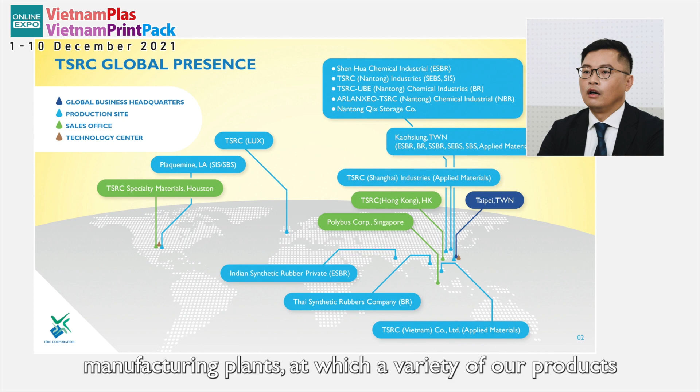Here, I would like to introduce you our worldwide operation network in more detail. As you can see from this world map, our main base of operation is in Taiwan, with our global business headquartered in Taipei. Kaohsiung also houses one of our most important manufacturing plants, at which a variety of our products are manufactured. We extended our company's reach first off to Thailand, and from there to China, where we have several production sites.

Besides, our joint venture in India is followed, and our acquisition of USA Dexco Polymer in 2010 enabled us to continue our success in the west of the world. Among all the production sites, TPE compound manufacturing is at 3 plants: Gangshan, Kaohsiung, Shanghai, and the Vietnam factory, which allow us to be close to our global customer and provide worldwide service.

This leads to the next topic of TPE compound manufacturing. Our TPE compound global production capacity is 23,000 tons per year, consisting of 3 plants among the 3 TPE compound production sites. Vietnam plant is our latest addition, established in October 2018, located in Binh Duong province in Vietnam, and it is also the first automation plant in TSRC.

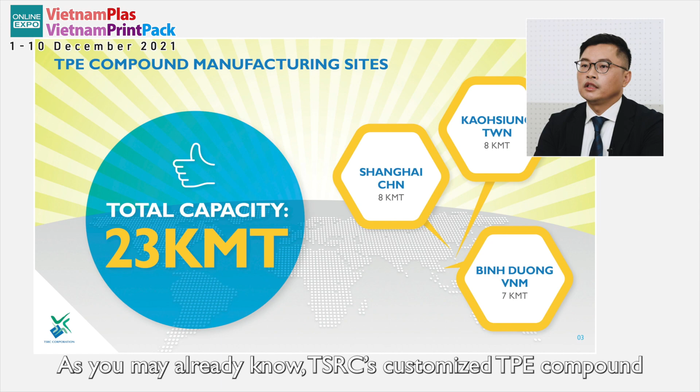As you may already know, TSRC customized TPE compound materials contain a variety of applications, and we aim to focus our advanced shoe material development, which we have our application research center in Gangshan, Taiwan, and the main production site in Vietnam. Now, please take a look at our first automated factory in Vietnam.

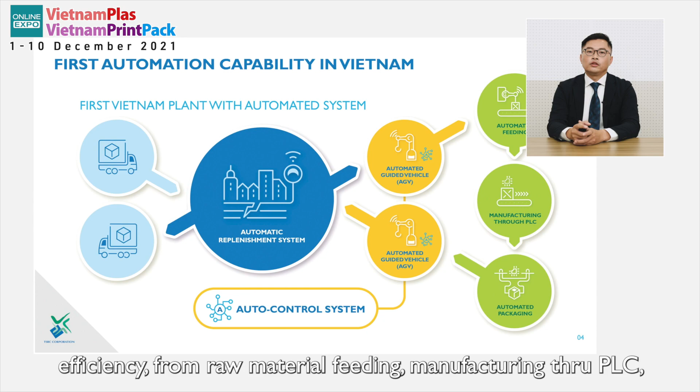The auto control system greatly enhances the production efficiency. From raw material feeding, manufacturing through PLC, auto packing to the product storage through automated guided vehicle. Each process is completed by highly automation.

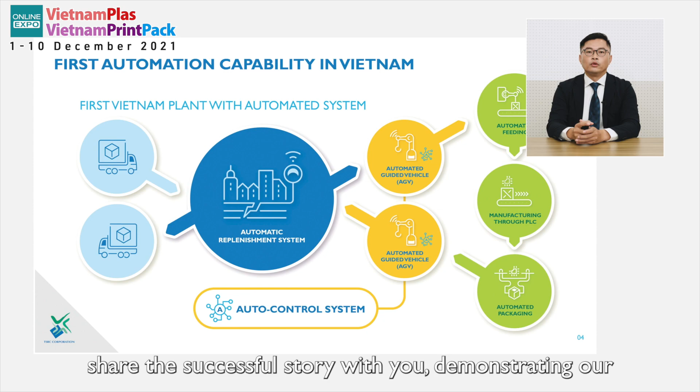This is another impressive milestone achieved by TSRC, and it's humble to share the successful story with you, demonstrating our commitment and determination for continued progress. We welcome your participation to become our business partner, joining together for a successful venture.

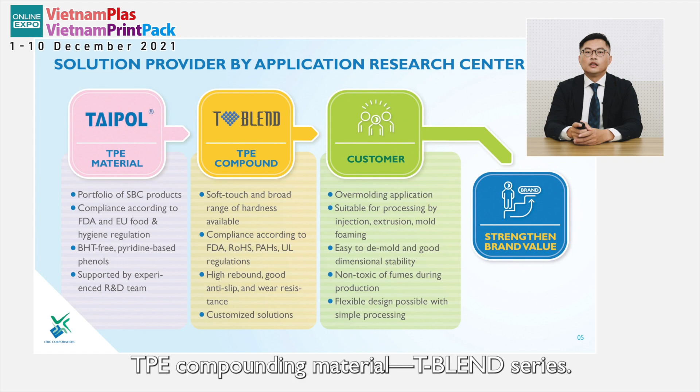Next, beside our automated production base, here I would like to give you a brief about our TPE compounding material, T-BLEND series. TSRC is vertically integrated under TPE material, TAIPOL, covering a full range of SBC products, complementing a total solution with our T-BLEND series, which is SEBS compound material compatible with EPDM or EVA.

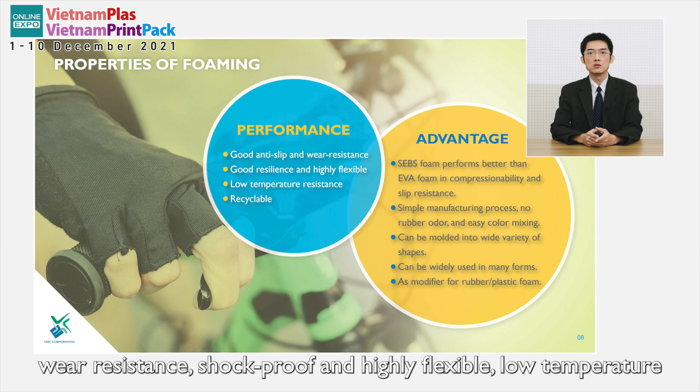Foaming properties of SEBS foam are superior to those of traditional EVA foam, with performances of anti-slip and wear resistance, shockproof and highly flexible, low temperature resistance, and recyclable, also with the benefits of wider processing window, no rubber odor, and ease of color mixing. It can be molded into a wide variety of shapes and used as a modifier for rubber or plastic foam products.

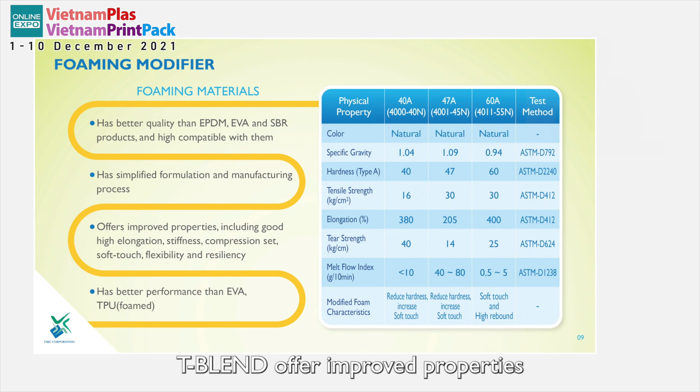T-BLEND foaming products are highly compatible with EPDM, EVA, and SBR. They can simplify formulation and provide a wider processing window. T-BLEND offers improved properties and has excellent performance compared to EVA and TPU foam.

Here are 3 examples of our existing T-BLEND products, including hardness of 40, 47, and 60 shore A. They feature hardness reducing, increasing soft touch, and high rebound performance.

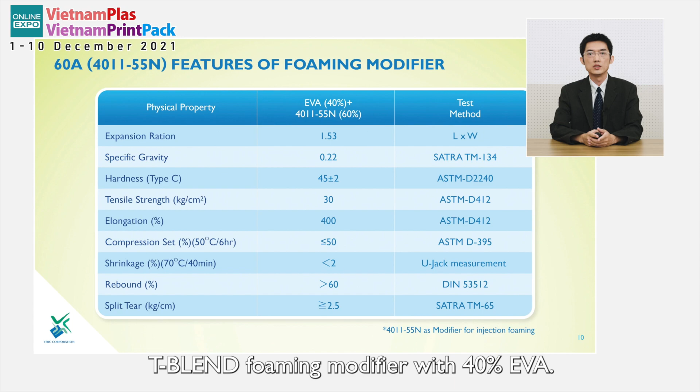Here shows one example of applying 60% of T-BLEND foaming modifier with 40% EVA. It improves elongation up to 400%, stiffness as tensile strength up to 30 kg per centimeter square, split tear more than 2.5 kg per centimeter, and compression set less than 50%. It is also soft touch with excellent flexibility and high resiliency more than 60%.

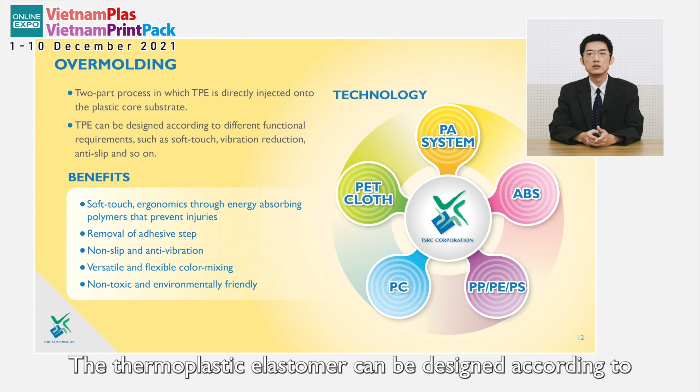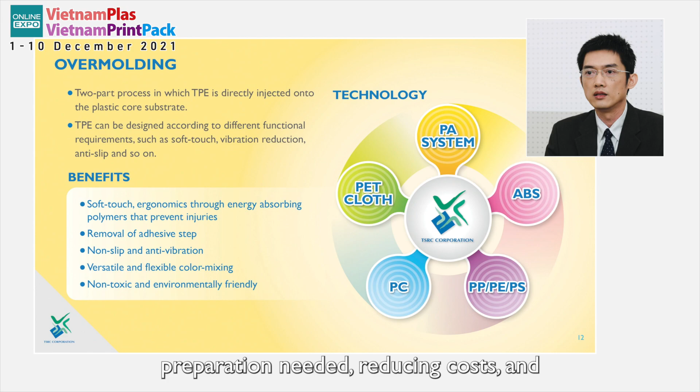Overmolding is a 2-part process in which the thermoplastic elastomer (TPE) is directly injected onto the plastic component. The thermoplastic elastomer can be designed according to different functional requirements, such as soft touch, vibration reduction, anti-slip, and so on. The benefits include removal of the adhesive step, no surface preparation needed, reducing costs, and being environmentally friendly.

TSRC's overmolding products include PP, PE, PS series, as well as engineering plastic overmolding products, such as applications on ABS and PC. They provide comfort, anti-slip, aesthetics, and different hardness for customers to choose from.

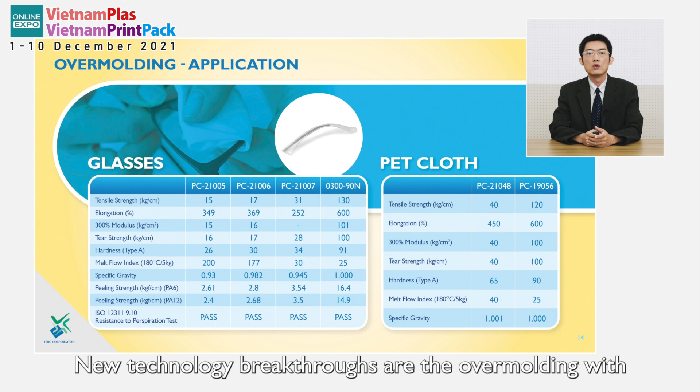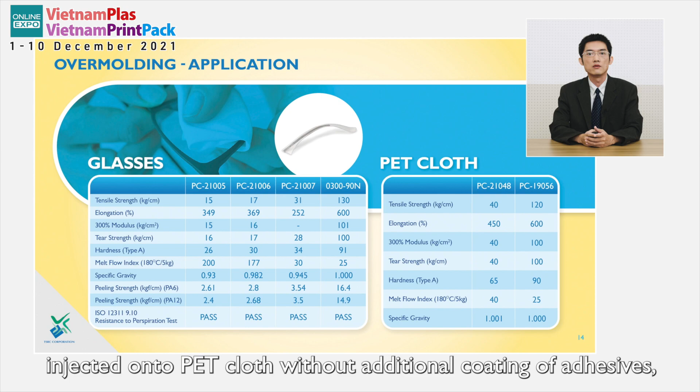New technology breakthroughs include overmolding with hardness lower than 40 shore A or greater than 80 shore A. These products are comfortable and have passed sweat resistance tests, making them very suitable for body-worn device applications such as eyewear and smartwatches. In addition, TSRC has developed products that can be directly injected onto PET cloth without additional coating of adhesives, which is helpful for automated production.

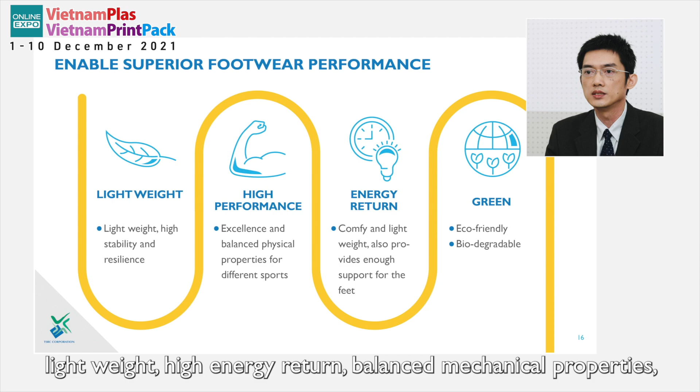Our products in the footwear industry perform well, especially in lightweight, high energy return, balanced mechanical properties, and they are also eco-friendly. Lightweight foam provides less weight and more stability. High performance provides excellent and balanced mechanical properties for different sports. High energy return provides enough support for the feet. Green is to provide eco-friendly solutions.

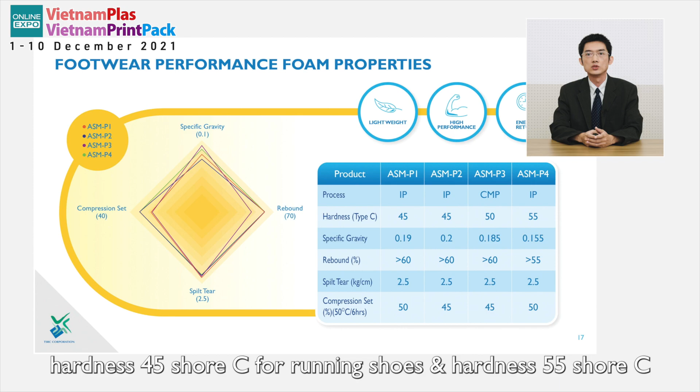Here are 4 products for footwear applications, including hardness 45 shore C for running shoes and hardness 55 shore C for basketball shoes. Each product features lightweight under 0.2, high resiliency more than 55 to 60%, stiffness of split tear more than 2.5 kg per centimeter, and good compression set less than 50%.

In order to cherish the Earth's resources, we would like to provide eco-friendly solutions by using biomaterials. We introduced green EVA, which is an 80% sugarcane-based ethylene with 30 to 60% bio content, maintaining critical physical performances with no additional processing or operation time, and product portfolios can be expanded.

To satisfy green requirements, we apply 20% bio content in our existing footwear foams. Key physical performances can remain at the same level, including specific gravity lower than 0.2, rebound more than 55%, split tear more than 2.5 kg per centimeter, and compression set less than 50%.

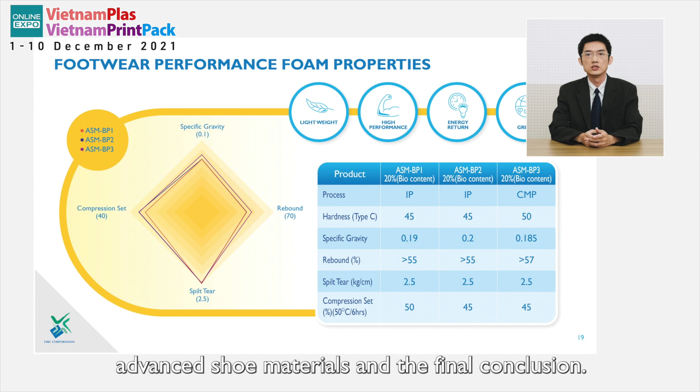Let's move to Ken again to introduce the vision of advanced shoe materials and the final conclusion.

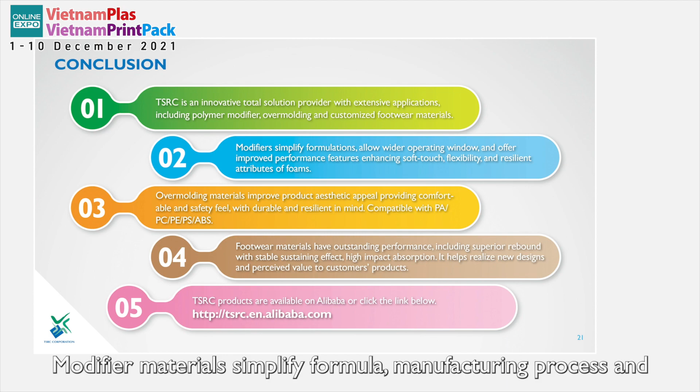Here, I would like to sum up the main aspects of TSRC T-BLEND materials. TSRC is an innovative total solution provider with extensive applications, including modifier, overmolding, and customized footwear materials. Modifier material simplifies formula and manufacturing process, and offers various features which can enhance the performance of soft touch, excellent flexibility, and resilience.

Overmolding materials make products comfortable, safe, resilient, durable, and appealing, and can be used on PA, PC, PE, PS, and ABS. Footwear materials have outstanding performance, including superior rebound with stable sustaining effect and high impact absorption. It helps realize new designs and add value to customer products.

Thank you all for your attention, and I hope you enjoy our presentation.

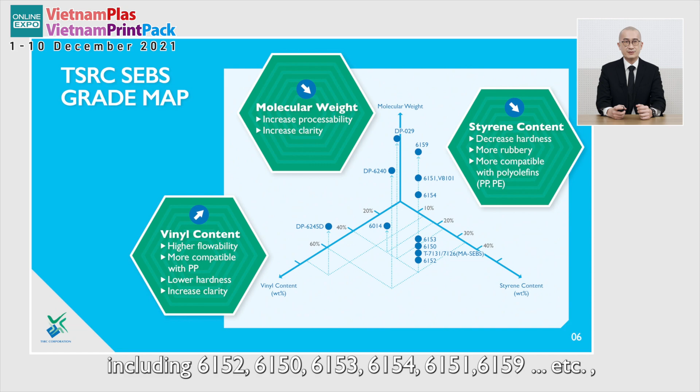TSRC provides conventional SEBS grades including 6152, 6150, 6153, 6154, 6151, 6159, etc., ranging from low molecular weight to ultra-high molecular weight. We also provide MA grafted SEBS 7131 and 7126, which can be widely used for overmolding and engineering plastics modification. For new developed SEBS grade, such as 6014,

DP6245D, DP6240, DP029, and medical grade Vector 8101. Besides molecular weight, we also adjust two other parameters, vinyl content and styrene content, to design new products.

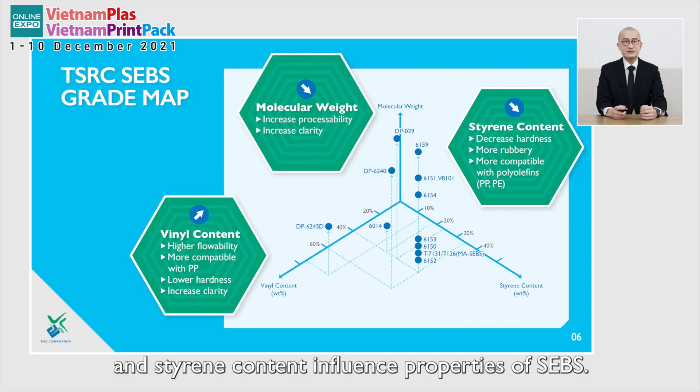Allow me to briefly introduce how vinyl content and styrene content influence the property of SEBS. When the vinyl content is higher, the flowability of SEBS will increase, and the compatibility with polyolefin and transparency will increase as well. The hardness goes down.

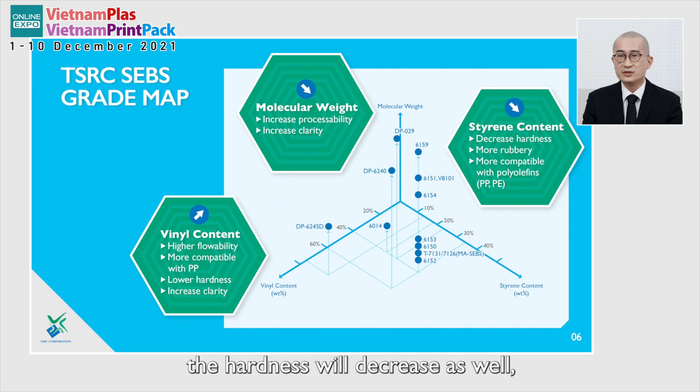When the styrene content decreases, the hardness will decrease as well, and the compatibility with polyolefin will be better. By using those three parameters, we can design differentiated SEBS products to provide to compounders or end users for their demand.

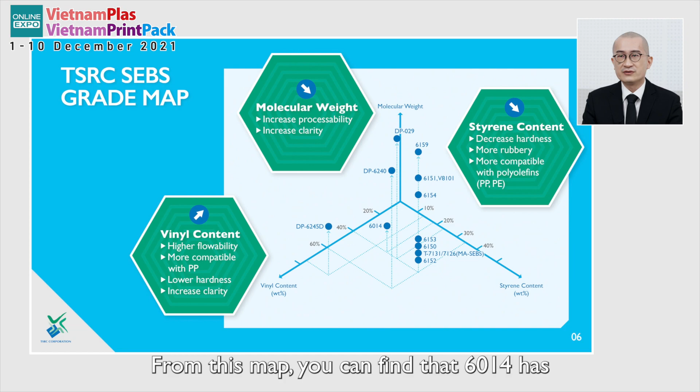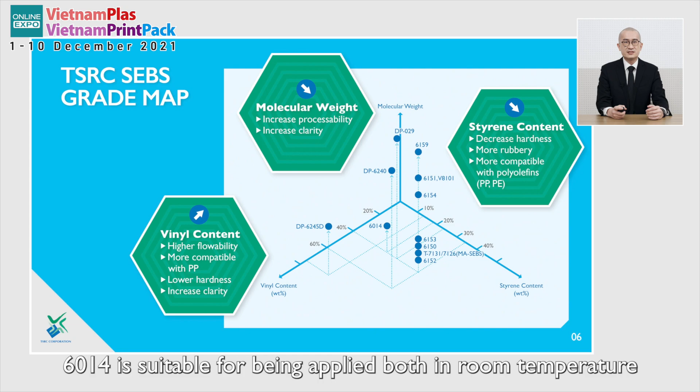Firstly, I would like to introduce 6014. From this map, you can find that 6014 has low molecular weight and low styrene content. Compared with conventional SEBS, 6014 has higher flowability. The melt flow index is about 4 to 6 at 230 centigrade, which means 6014 can be processed without extender oil. With good physical properties and toughness, 6014 is suitable for application in both room temperature and lower temperature environments.

Next one is DP6245D. It is low styrene and high vinyl content, which is capable of making transparent compound. Same as 6014, DP6245D can be processed without oil as well. It is suitable for medical applications like medical tubing or medical film, and products where oil is not desirable. Additionally, DP6245D is also suitable for food contact applications or plastics modification.

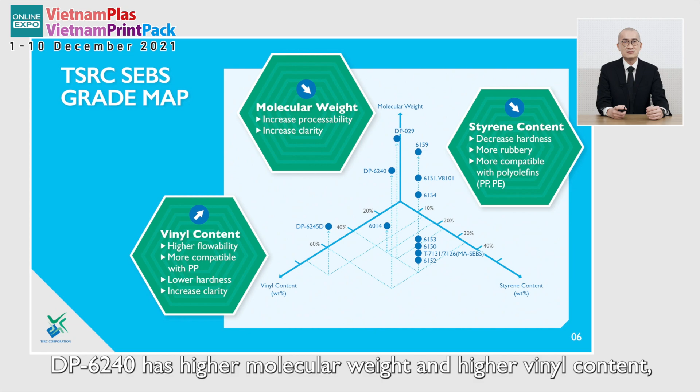The third new product is DP6240. DP6240 has higher molecular weight and higher vinyl content, which means DP6240 has better flowability and processability, which is suitable for injection molding of large parts.

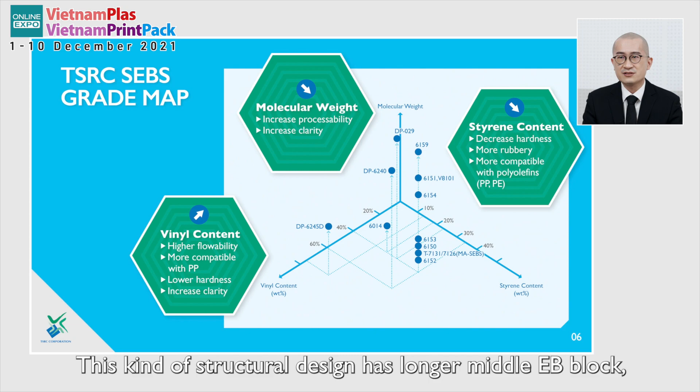The last one is DP029. DP029 has a lower styrene content and ultra-high molecular weight. It has the highest molecular weight among TSRC SEBS products. This kind of structural design has a longer middle EB block, which makes DP029 an excellent oil absorption and oil holding product. It is suitable for high oil extended applications, such as soft toys.

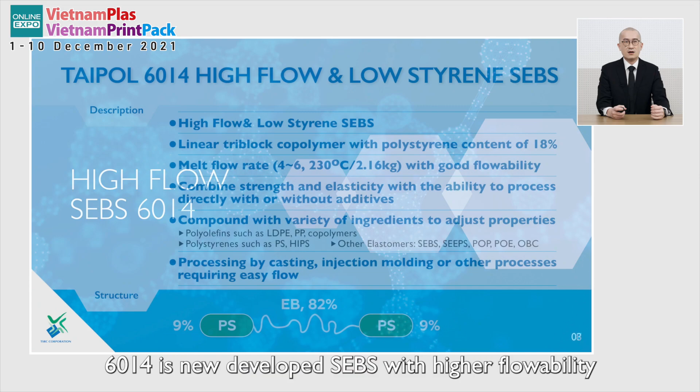So next, I would like to give a detailed introduction to each newly developed SEBS grade. The first one is high flow SEBS 6014. 6014 is a new developed SEBS with higher flowability and lower styrene content. The molecular weight structure is shown in this slide. Compared with current SEBS grade, the polystyrene blocks on the two ends of the molecular chain are shorter, and the middle EB block is longer. The structural design allows 6014 to be processed without extended oil.

The melt flow index is about 4 to 6. 6014 is suitable for blending with other plastics or elastomers, such as PP, PS, POE, etc., which means it can be used in different types of processes and various applications. In addition to higher flowability and lower hardness, 6014 also shows excellent impact resistance at low temperature. The detail of impact resistance will be introduced in later slides.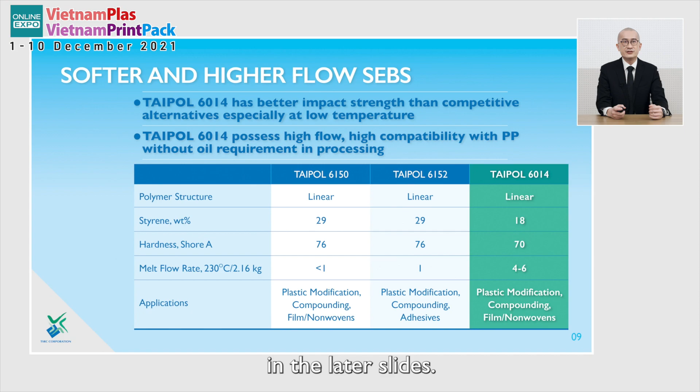The table in the slide shows some basic properties of 614 compared with the current grade. As you can see, the styrene content of 614 is lower, about 18%. And the hardness of neat polymer is lower as well, about 70. With higher flowability, 614 can be applied to plastic modification, general compound, cable, and film applications.

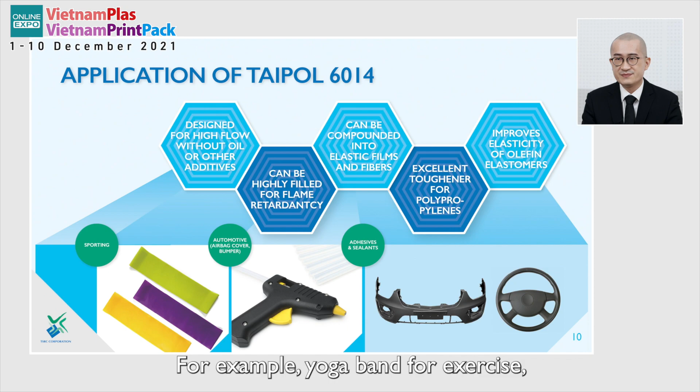Because 614 has a special structural design, it brings features like high flowability and easy processing. 614 is suitable for use in various applications. For example, yoga bands for exercise - 614 can help reach better elasticity. 614 can also be used in car bumpers or interior parts in automotive applications, enhancing the effect of impact resistance. Another example is using it in adhesive for modification.

In addition, 614 can also be used in flame retardancy applications. Replacing a certain portion of extended oil, it can reinforce the effect of the flame retardant so that less flame retardant can be used, saving the total cost.

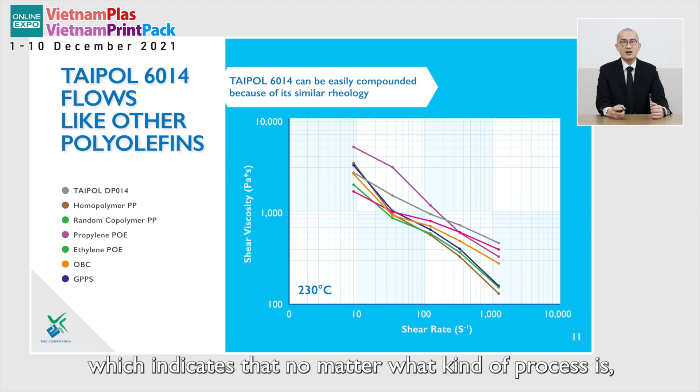As mentioned earlier, 614 can be blended with plastics or elastomers in compound formulation. We know that flow is a key factor. Huge differences in flowability may cause many problems in processing or end products, such as unstable extrusion, dispersion unevenness, or patterns on end products. The figure in this slide displays capillary rheology at 230 centigrade. You can find that 614 has close flow properties to some common plastics or elastomers, like PP or POE. From low shear rate to high shear rate, 614 has similar shear viscosity to those general purpose plastics and elastomers, which indicates that no matter what kind of process is used, 614 is workable with other ingredients.

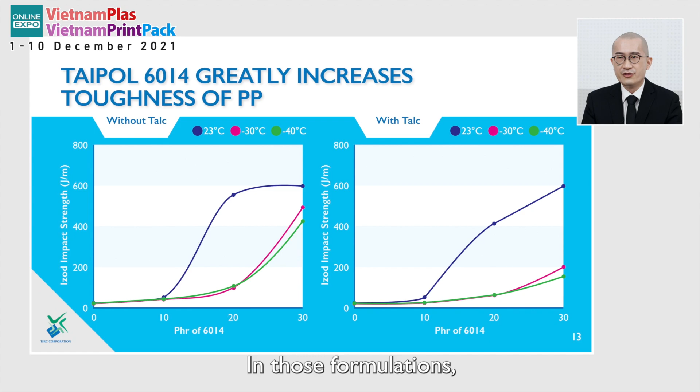In addition, filler is often used in compound formulation to enhance certain physical properties or reduce cost. In those formulations, 614 can also achieve good impact property.

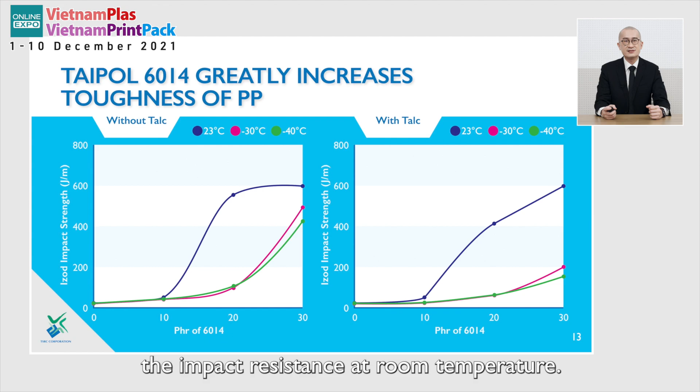Besides room temperature, impact property under low temperature environment is the focus of compounders or end users in some applications, such as automotive. The figure in this slide shows impact resistance of modified PP with talc and modified PP without talc. Both figures suggest that whether talc is present or not, having 20 pHr of 614 can greatly increase the impact resistance at room temperature, while at low temperature -30 centigrade or -40 centigrade, having 30 pHr of 614 can also achieve the same impact resistance performance.

It indicates that 614 is not only a good toughening agent, but also a team player in a multiple ingredients formulation. In previous slides, we suggested that 614 can compound with elastomer to enhance overall elasticity of formulation. Here, I would like to show you an example in automotive applications.

In this automotive part, we use 60% of PP and 20% of talc. And we also have 20% of POE to make it tough. In this 20% of POE, we try to mix with some 614. By changing the ratio of POE and 614, we want to observe how 614 can assist POE to become tougher at low temperature.

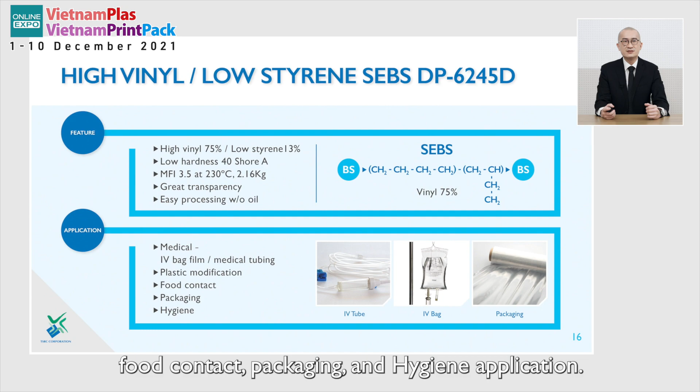In compound formulation, it is convenient to utilize DP6245D to adjust hardness. A wide range of hardness is achievable by compounding with DP6245D. In this slide, we blend different portions of DP6245D in PP. You can see that the hardness range can be reached from 60D to 40A.

It is demonstrated that DP6245D is an excellent choice at adjusting hardness without extended oil, which is beneficial to those applications where oil is not desirable. It can also avoid problems of oil bleeding or migration.

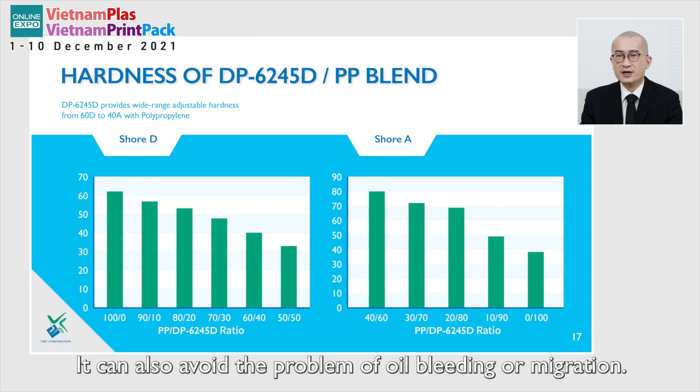Another important feature of DP6245D is the high transparency, which makes DP6245D a great choice for high transparency goods, such as film, tube, or others, where clarity is necessary to see through.

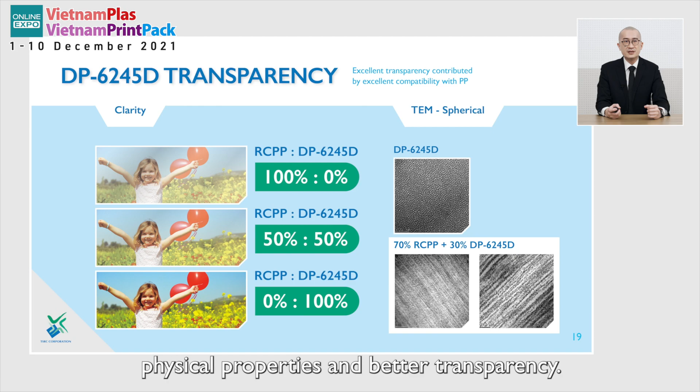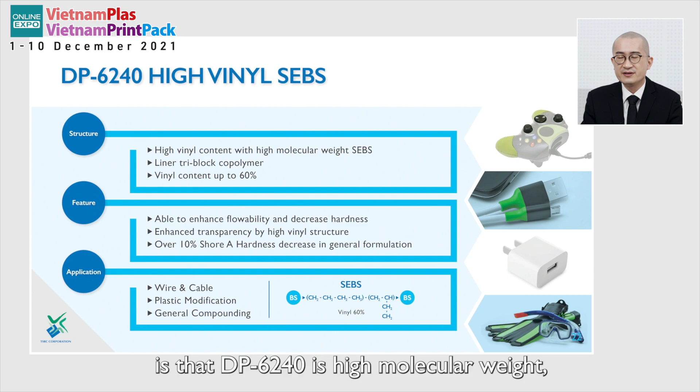Next, I would like to introduce high vinyl SEBS DP-6240. Just like DP-6245D, DP-6240 is a high vinyl product. Vinyl content is 60%. The difference between DP-6245D and DP-6240 is that DP-6240 is high molecular weight. The molecular weight is similar to current grade 6151.

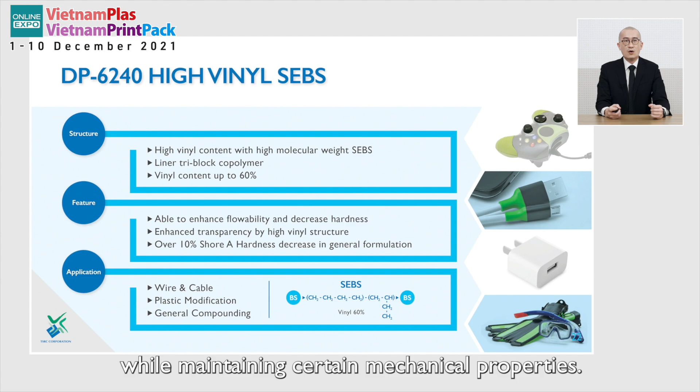Styrene content is 32.5%. This kind of high vinyl, high molecular weight structural design allows DP-6240 to have better flowability, processability, and transparency, while maintaining certain mechanical properties.

Compared with 6151, high vinyl DP-6240 is softer. The hardness can be reduced by 10A in compound formulation. It can be applied to wire and cable, plastic modification, and general compound.

From different perspectives, DP-6240 can use less extended oil to achieve the same hardness as 6151, which makes DP-6240 more suitable for some applications requiring low oil bleeding or high flame retardancy.

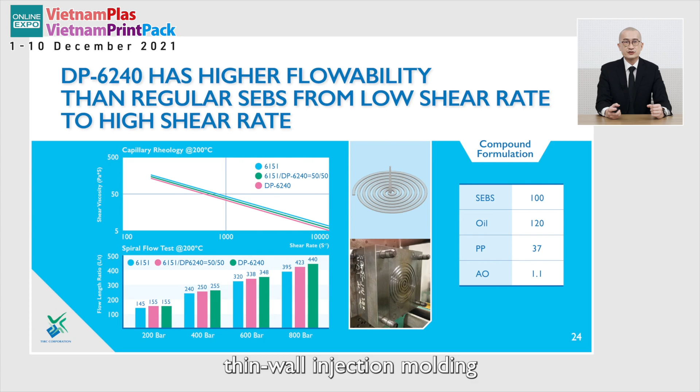As mentioned in previous pages, the high vinyl DP-6240 has better flowability. From capillary rheology or spiral flow test, the shear viscosity of DP-6240 is lower than 6151, and flow length of DP-6240 in spiral flow test is longer than 6151 under different injection pressure, which demonstrates that DP-6240 is especially suitable for large part injection molding, thin wall injection molding, or other compound methods requiring higher flow.

In customers' feedback, they also recognize that DP-6240 has higher flow, lower hardness, and better transparency. The surface of injection part has a better touch and less flow lines.

In the last part of newly developed SEBS, I would like to introduce ultra-high molecular weight and low styrene content SEBS, DP-029. DP-029 has ultra-high molecular weight.

The molecular weight is about 1.5 times that of high molecular weight 6151, and the styrene content is less than conventional grade, about 23%. This kind of long molecular chain but shorter end block design makes middle EP blocks longer, which enables DP-029 to have the best oil absorption capacity among all SEBS grades.

It is especially suitable for high oil extended formulation and capable of having drier touch and less oil bleeding. Compared with current grade 6151 and 6159, DP-029 has outstanding oil absorption capacity and less oil bleeding.

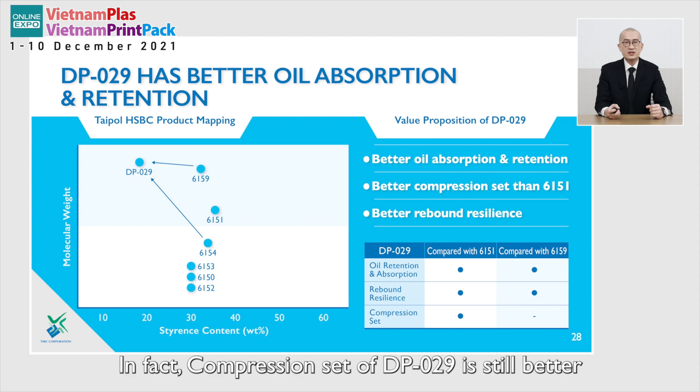With lower styrene content and longer middle EP block, DP-029 brings more resiliency. And because it is ultra-high molecular weight, DP-029 is capable of maintaining compression set without suffering from lower styrene content. In fact, compression set of DP-029 is still better than high molecular weight 6151.

Here, we use a basic formulation to evaluate the performance of DP-029. The formulation includes low oil content formulation A and high oil content formulation B. We would like to see the property of oil absorption capacity, oil bleeding, and compression set.

As mentioned in previous pages, compared with 6151 and 6159, DP-029 has excellent oil absorption property. In this slide, we test the oil absorption capacity of neat SEBS powder by immersing SEBS into oil with different time - let's say 1 minute, 3 minutes, and 5 minutes.

Then we calculate the weight differences before and after immersion. From the test result, we can see that no matter what the immersion time is, DP-029 absorbs the most oil. The test results suggest that DP-029 has better oil absorption performance than the conventional grade.

In addition to oil absorption capacity, DP-029 also has outstanding oil holding properties, which means it can bleed less oil. In this test, we put the injection molded sample in contact with cardboard at 70 centigrade for 72 hours and calculate how much weight is lost. Clearly, the weight loss is due to bleeding oil absorbed by the cardboard.

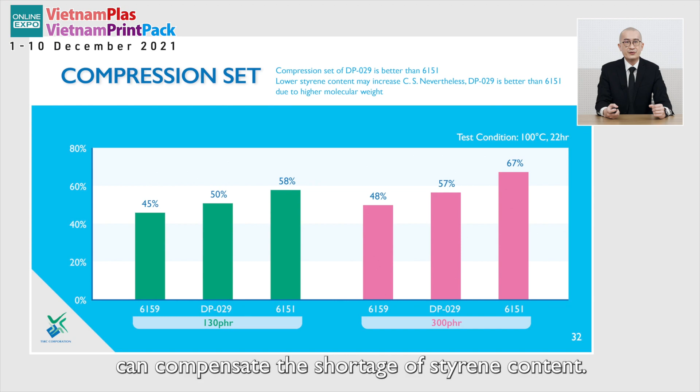From the figure, we can find that regardless of low oil content or high oil content, the compression set of DP-029 is still better than high molecular weight 6151.

To briefly summarize, the general SEBS grade is gradually unable to meet the requirements of new downstream applications. The market desires new SEBS polymer to develop new value-added products. As leading company of elastomer, TSRC proactively cooperates with downstream customers to provide high-flow, easy processing SEBS products such as

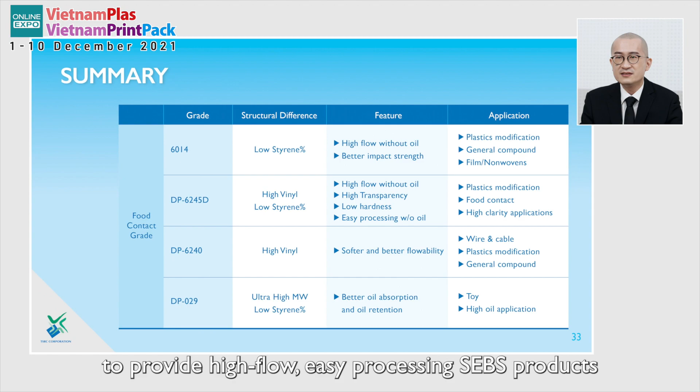6014, DP6245D, DP6240. Moreover, if your products require higher impact strength, you can choose 6014. If your products require high transparency, you can choose DP6245D. If your products require high physical properties and use in large parts or single injection molding, you can use DP6240.

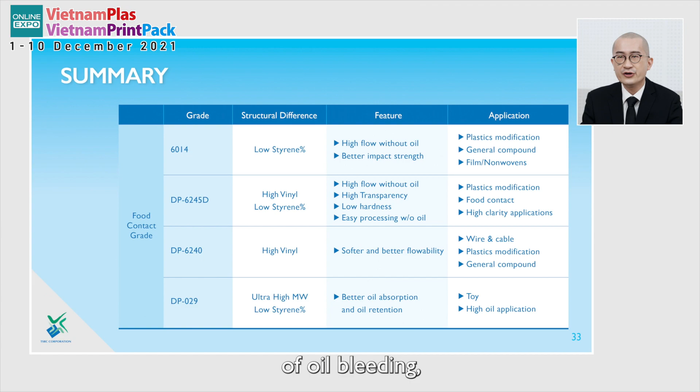If your products require high oil extent without risk of oil bleeding, DP029 will be your best choice. All of the products mentioned have passed the food contact FDA test as other commercial grades. They are reliable and safe to use in diverse end products.

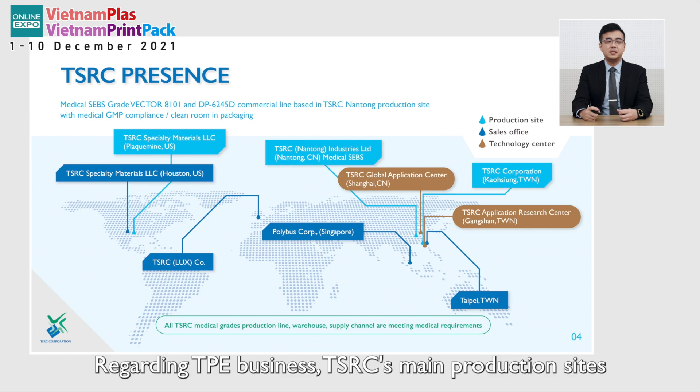Regarding TPE business, TSRC's main production sites are in Taiwan, China, and the US. Among them, SEBS production sites are located in Nantong and Kaohsiung. TSRC also possesses a global application center in Shanghai, China, and Gangshan, Taiwan, to provide technical support to downstream customers. TSRC medical SEBS, such as Vector 8101 and DP6245D, are both produced in the Nantong production line. This production line is supplied based on medical GMP production standards. The packaging area is equipped with a class 100,000 clean room to provide stable and reliable quality.

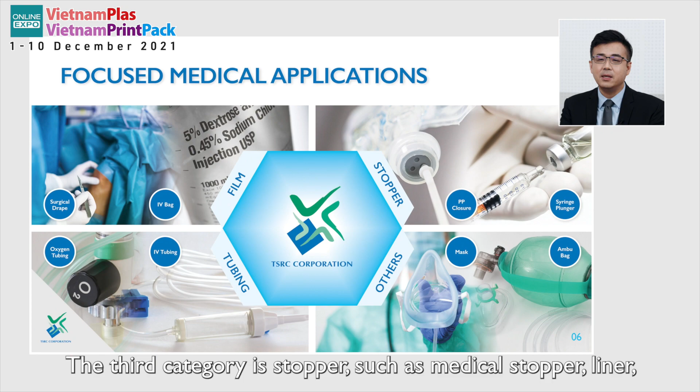Next, I'm going to share with you TSRC medical solutions and our focusing applications in the following slides. Currently, TSRC is primarily focusing on 4 types of applications. The first category is film applications, such as IV bag film, surgical drape, and so on. These products could use blown film or casting film technology as forming process. The second category is tubing applications, such as IV tubing, oxygen tubing. The third category is stopper, such as medical stopper, liner, PP closure, syringe tip, and other sealing materials. The last category is soft touch materials, such as ambu bag, mask, tourniquet, which contact with the skin only.

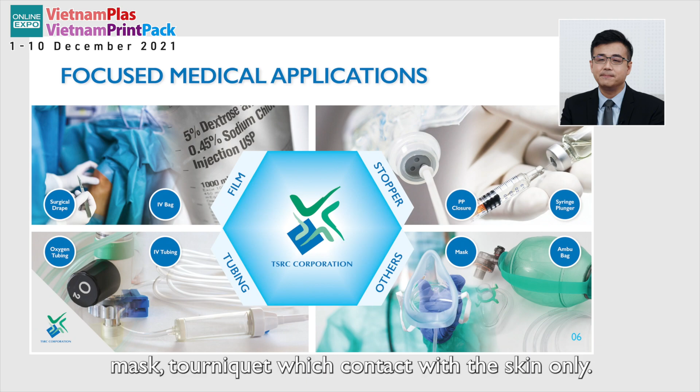TSRC medical SEBS has passed the 10993-5 test and the USP Class 6 test, which are crucial for medical raw materials. It does not contain aromatic plasticizer and is based on medical GMP management. It is also an environment-friendly material. There are 2 major product series for medical applications. The first one is the high vinyl DP6245D, which is under development.

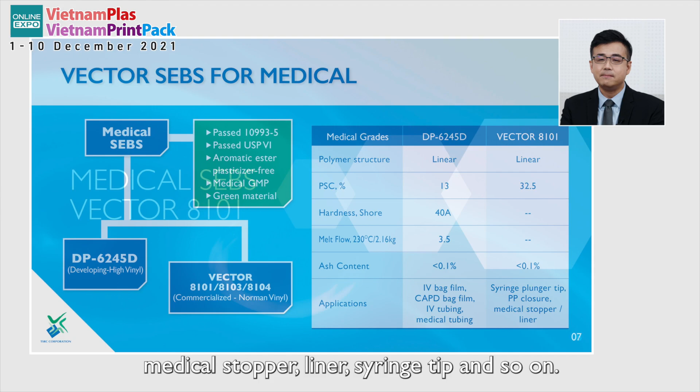DP6245D is a high vinyl and low styrene polymer. The product feature is high transparency and low hardness. It is suitable for IV bag film, CAPD bag film, IV tubing, medical tubing, etc. The other series is Vector 8101, 8103, 8104, which have been commercialized. The series products have low ash content below 0.1% to meet medical pharmacopoeia requirements. Suitable for PP closure, medical stopper, liner, syringe tip, and so on. First, I would like to introduce Vector 8101.

8101 can be used in plastic modification and TPE compound application by formulation design. The required hardness can be obtained by adjusting the ratio of PP, SEBS, and the extended oil, which has good performance to improve impact strength.

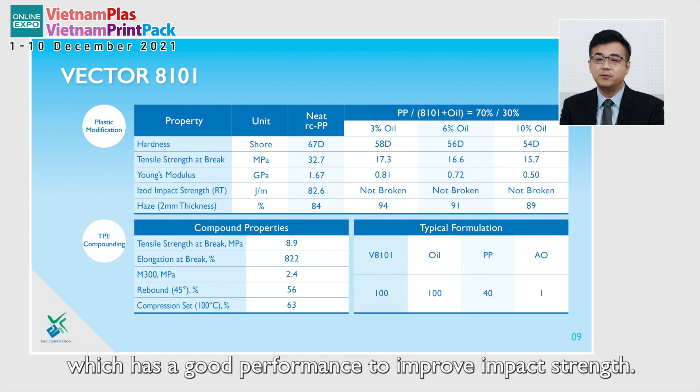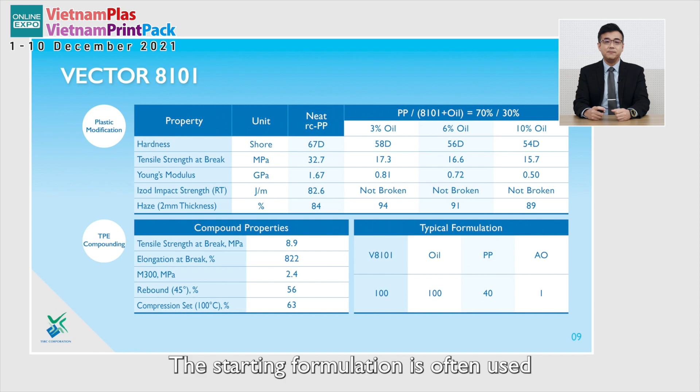As you can see from the table, when 70% of PP is blended with 30% of 8101 and the extended oil, the hardness of PP 67D can be reduced to under 58D in proportion to oil content. And the impact strength increases from complete broken to non-broken. This starting formulation is often used for inner and outer TPE closure in IV sets.

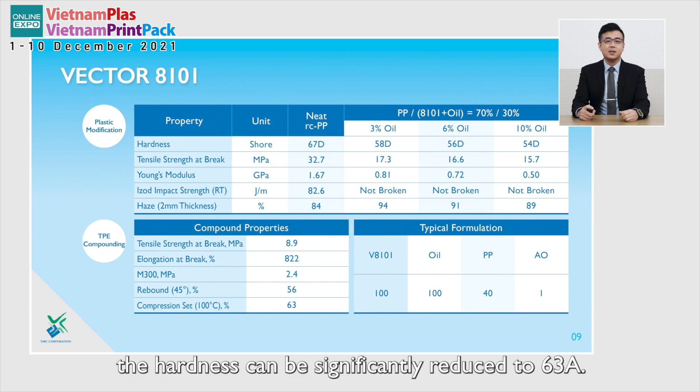Regarding TPE compounding applications, when 100 pHR of 8101 is blended with 100 pHR of extended oil plus 40 pHR of PP, the hardness can be significantly reduced to 63A. This starting formulation is commonly used as a medical stopper, liner, and so on.

China YBB regulation of PP closure indicates that the inner cap must be tested by an 18 gauge needle, and the amount of piercing residue must be less than 20. Of course, the lower the piercing residue, the better.

We found that when PP is 70%, 8101 is 24%, and the extended oil is 6%, this formulation could achieve zero piercing residue. We also found that this amount of piercing residue is related to the impact strength. When the impact strength is higher, the amount of piercing residue is lower. Therefore, the impact strength is also an important indicator for PP closure.

Of course, this formulation is also just a starting formulation, which can be adjusted according to the user's need for other physical properties.

Next, we will discuss the application of 8101 in medical stopper and liner. The hardness of common medical stopper is around 40A. We can also adjust the ratio of SEBS 8101, PP, and the extended oil to make the hardness range from 35 to 50A to meet the needs of different physical properties.

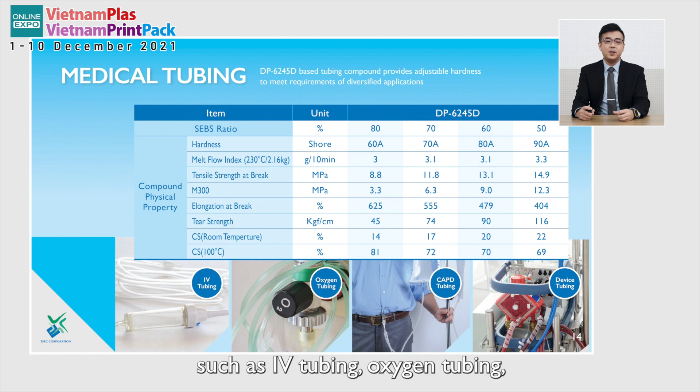Due to its high transparency, DP-6245D is suitable for various medical tubing applications, such as IV tubing, oxygen tubing, CAPD tubing, device tubing, and so on. According to different formulations, it can be adjusted to different hardness.

Here are a few starting formulations for your reference. Common tubing hardnesses are 60A, 70A, 80A, and 90A, which can be adjusted by the ratio of SEBS DP-6245D and the PP without oil extension.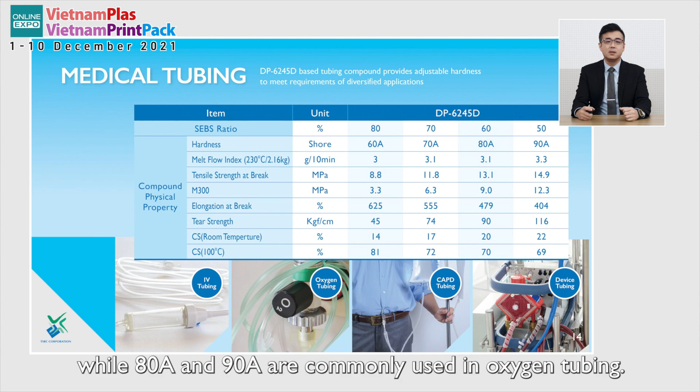Generally speaking, 60A and 70A are commonly used in IV tubing applications, while 80A and 90A are commonly used in oxygen tubing. With lower hardness, the DP6245D ratio will be higher, which will generate higher transparency. All of these formulations could perform good physical properties.

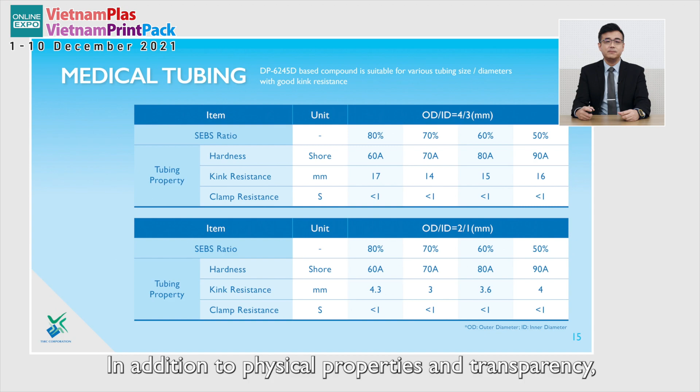In addition to physical properties and transparency, there are two important indicators that are often monitored. The first one is kink resistance. When the value is lower, less kink will occur, which means liquid or gas transportation will be more reliable.

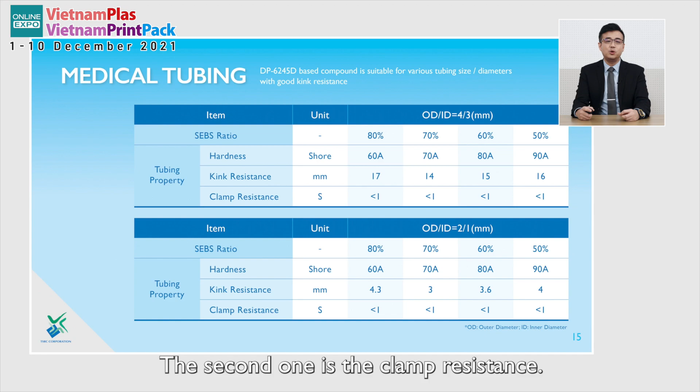The second one is clamp resistance. Since IV tubing often uses a roller clamp to control the flow rate, when the value of clamp resistance is lower, medical tubing could quickly recover after the roller clamp is removed. In other words, less tubing clogging will occur.

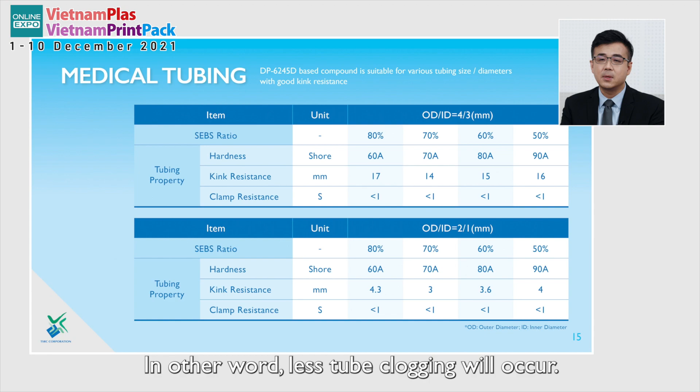As you can see from our lab data, two thinner tubings are tested because thinner tubing is more likely to kink and clog. The two tubings are 4 mm outside and 3 mm inside, and the other is 2 mm outside and 1 mm inside. From the table, we can see that the values of different hardness have similar and good testing results.

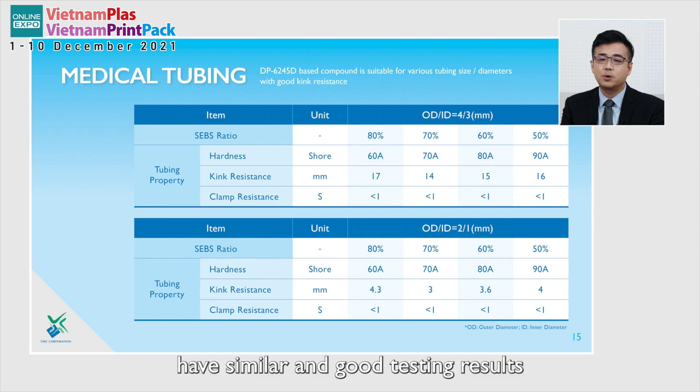In addition to physical properties, sterilization is also a very important procedure in medical applications. There are several common sterilization methods, such as steam sterilization and gamma radiation. The common concern with raw material is whether the physical properties will deteriorate after sterilization. Therefore, we compare the physical properties after sterilization in our lab testing.

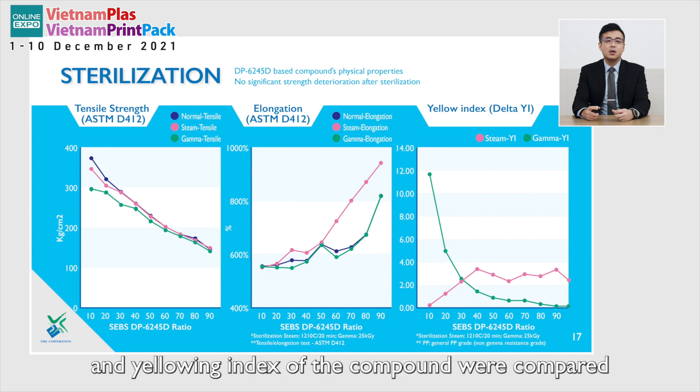In the test, tensile strength, elongation, and yellowing index of the compound were compared after steam sterilization and gamma radiation. The compounds are made with different ratios of SEBS DP6245D and PP. The steam sterilization condition is 121 centigrade for 20 minutes, and the gamma radiation is 25 kilograys.

First, let's look at the tensile strength comparison. The blue line is the value measured before sterilization, the red line is the value measured after steam sterilization, and the green line is the value measured after gamma sterilization. From the figure, the data before and after steam sterilization and gamma sterilization are basically very close, and there is no obvious gap.

Next, look at the comparison of elongation. We can see there is not much difference after gamma sterilization, but the elongation increases after steam sterilization, especially when the SEBS ratio is relatively higher.

Lastly, let's see the comparison of the yellowing index. After steam sterilization, there is about a 3 point increase in yellowing index value, but the difference is not obvious—unlikely to observe the differences by naked eye.

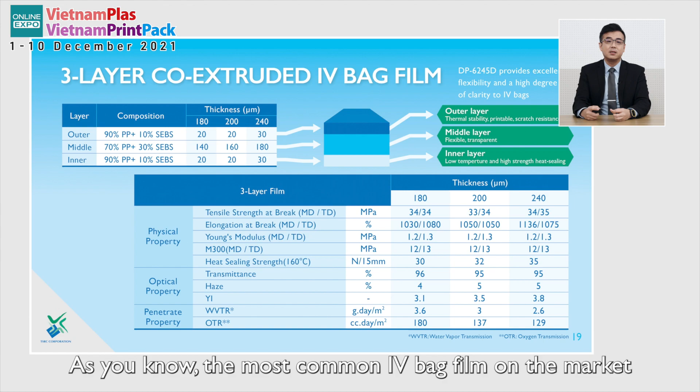In the next section, I would like to introduce the application of DP6245D in IV bag film application. As you know, the most common IV bag film on the market is a 3-layer co-extruded film or 5-layer co-extruded film. Here is an example of a typical 3-layer film.

Each layer has a different function. The outer layer must have heat resistance and scratch resistance. The middle layer must be flexible and transparent. The inner layer needs to have low temperature sealing capability and high sealing strength.

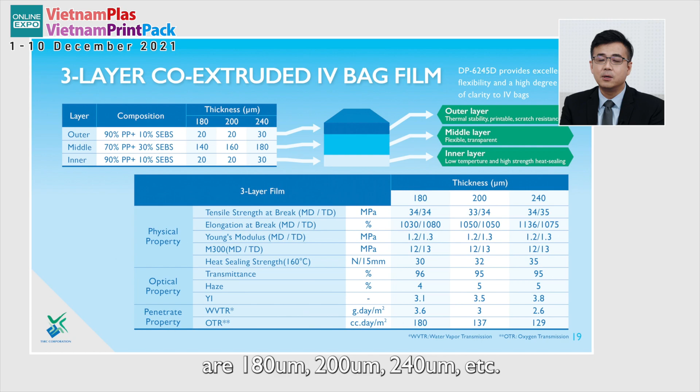Generally speaking, the thickness of the middle layer is thicker than other layers to ensure its flexibility and transparency. The typical thicknesses of a 3-layer co-extruded film are 180 micron, 200 micron, 240 micron, etc.

From our lab data, we can see that besides good physical properties, the material has very good transmittance, which means high transparency. In addition, haze and yellowing index are quite low. The water vapor transmission rate and oxygen transmission rate are also very good, which will be explained in the following slides.

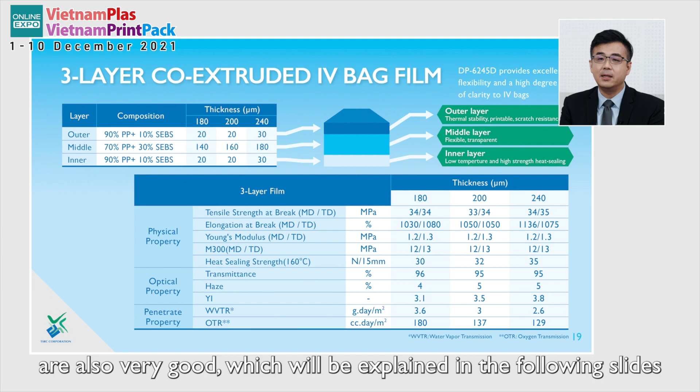One of the important indicators of IV bag film is the heat sealing strength. When the sealing strength is high, the risk of broken bags can be reduced. According to China YBB regulation, the heat sealing strength of IV bag must be higher than 25 Newton.

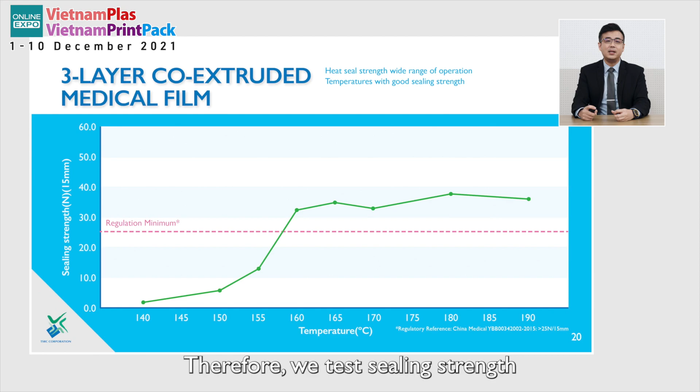We found that the heat sealing temperature will affect the sealing strength of the finished product. Therefore, we test the sealing strength from a sealing temperature of 140 centigrade to 190 centigrade. As we can see from the chart, when the heat sealing temperature reaches or is higher than 160 centigrade, the heat sealing strength will be significantly improved.

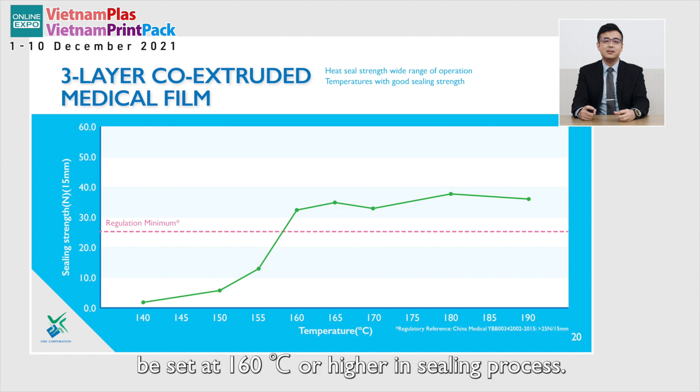Then it complies with China YBB regulation. Therefore, we recommend that the heat sealing temperature be set at 160 centigrade or higher in the sealing process.

Another important indicator of IV bag is the water vapor transmission rate (WVTR) and the oxygen transmission rate (OTR), to ensure the stability of the infusion solution and avoid being polluted by the external environment. According to YBB regulation, the WVTR must be under 5 gram, and the OTR must be under 1,200 milliliter.

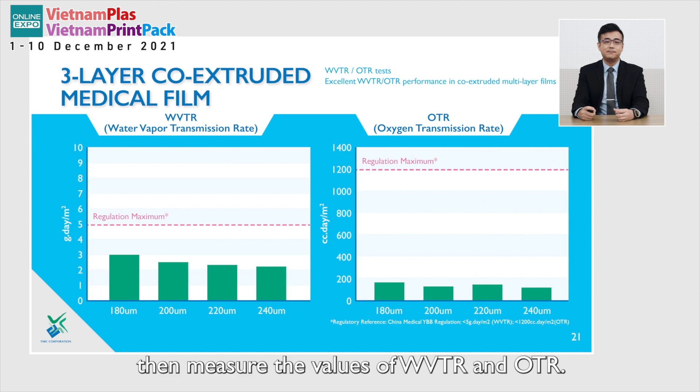We use SEBS DP6245D blended with PP to produce 4 types of thickness IV bag film: 180, 200, 220, and 240 micron. Then we measure the values of WVTR and OTR. From the test data, we can see no matter which thickness it is, it has excellent water vapor and oxygen barrier. Therefore, they are suitable to apply in IV bag film applications.